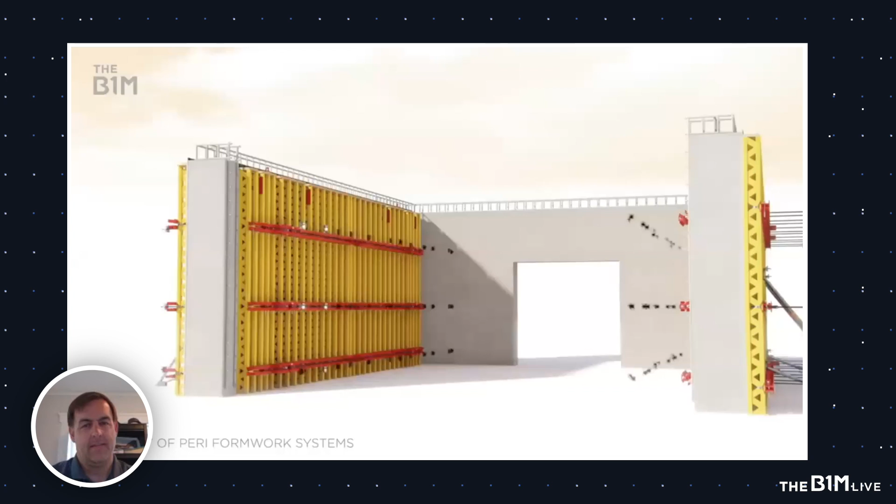I want to bring in Stephen Bradbury from Peri here, because Stephen, I think it's useful for people to understand, before we get to the complexities of how you build a concrete core after a steel frame, how you would normally build it with a Peri ACS 400 jump core system. So are you okay if I play this video just to kind of talk us through what's happening and how the system works? Yeah, sure, no problem, go for it.

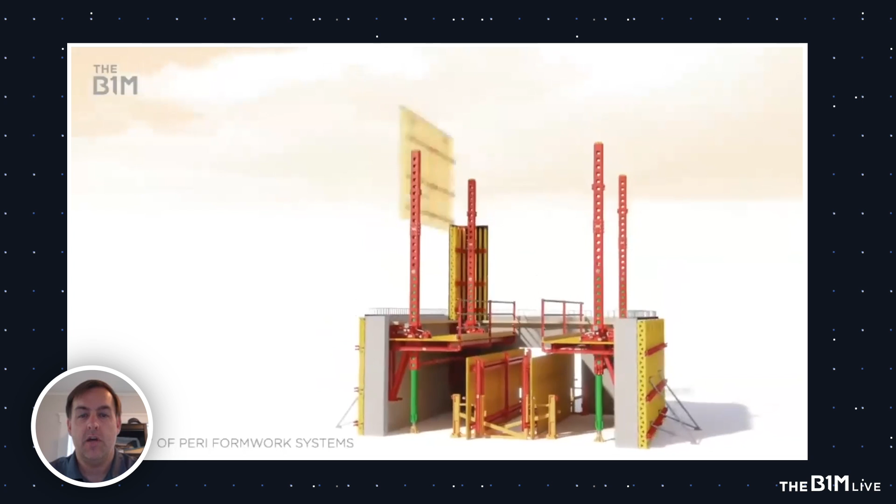So here we see the first pour being made with our Vario panels, the concrete struck, and now we're installing the internal hydraulics. And typically this is what's lifting the entire interior and outside formwork.

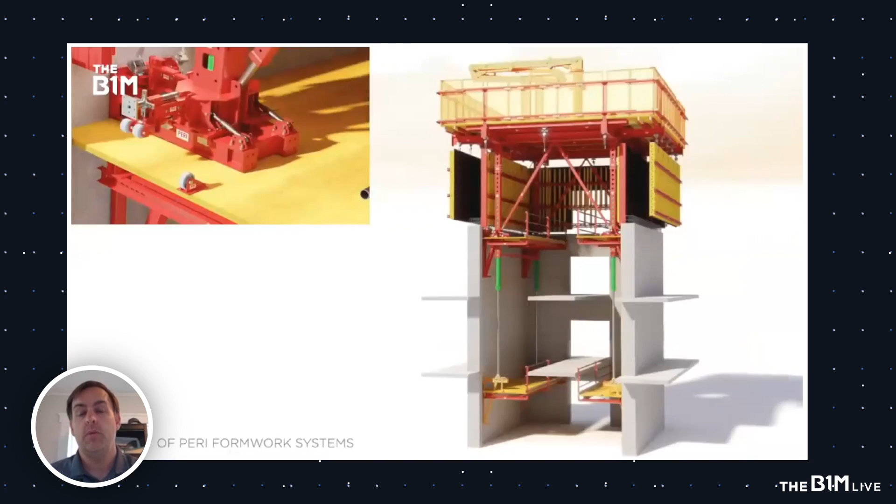So everything's climbed from the inside of the core, including the exterior forms, which are large panels to minimize the amount of labor, to minimize the amount of assembly. So in a normal application, this is what we're seeing. And you see the green rams. These are our hydraulic pistons that are anchored into the inside wall formwork. So we push up off the cast-in-place anchors.

Another live photo of a project, and it's all being climbed from the inside. The outside is being hung on our gallows systems, so everything is connected and driven by the inside platforms. And this is what we would see in a typical core job, and how we would like to do it on every job if possible.

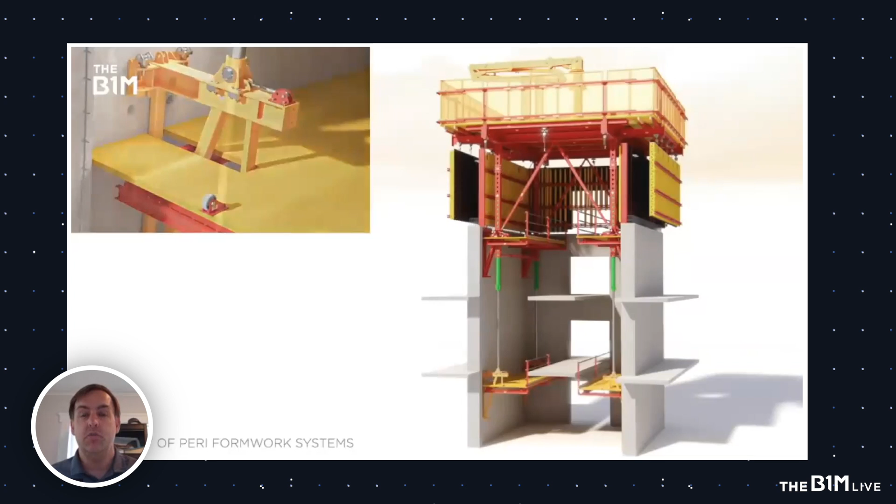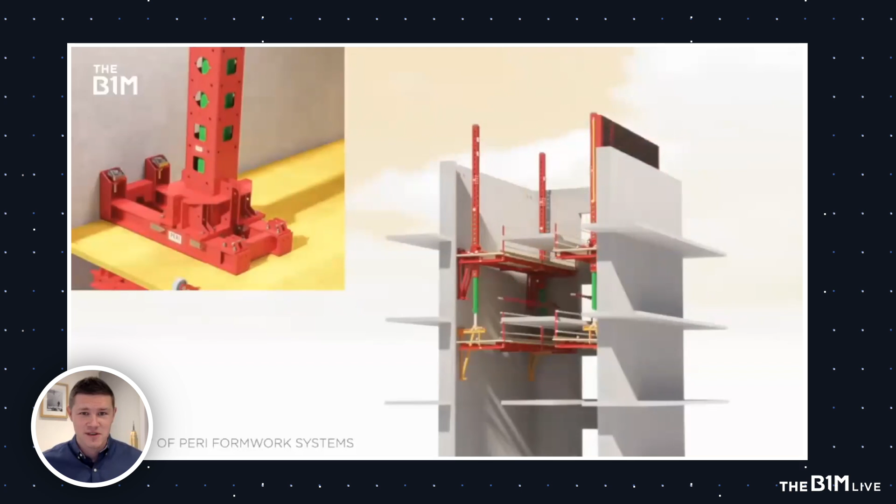Fantastic. That's a really good explanation. You can see it's an incredibly slick and well-perfected system. It is complicated, but it's very slick. It works very well on a number of skyscraper projects. And once it's in place, it requires very little labor to keep it going up. You know, some guys to strip ties and run the machines, but all the hard work is done in the installation, if it is hard, and then the next step is get it off the building at the end of the job.

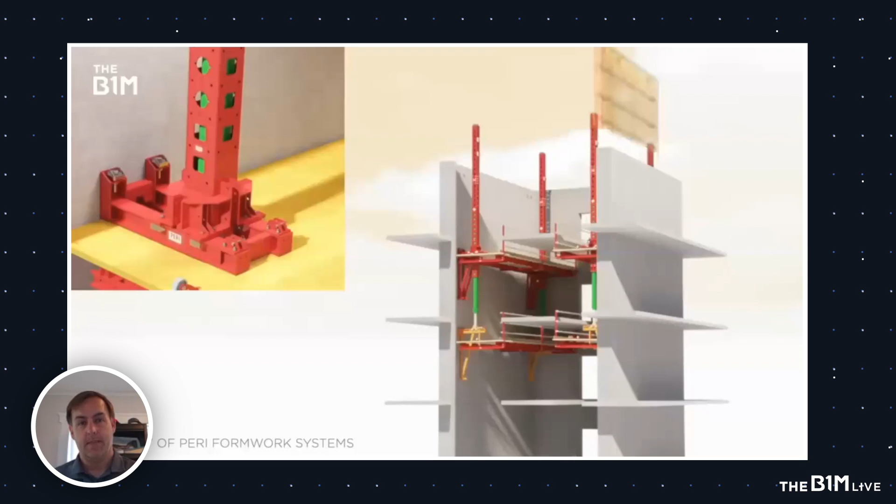Next thing is concrete pouring. So often the concrete slabs and verticals are poured at the same time, where you have a fully cast in situ concrete building. So forget steel frame construction, full cast in situ concrete building. You tend to pour the verticals and slabs at the same time in New York, which comes down to time and to speed, and helps construction teams really get to that 3-day cycle. So every 3 days they're moving up onto the next story of the building, and that's how quickly these buildings can rise on the skyline. Again, we're going to hear a little bit more about that later on from Stephen at DeSimone.

Now, last but not least, the Department of Buildings approvals, which I know Stephen Bradbury from Peri is very familiar with. This is a kind of special body, certainly in New York City, that has to verify and check concrete jump core systems. So the kind of systems we just saw in that video, they have to be verified, checked, and reviewed independently by this body before works can progress on site.

That adds time, it adds a bit of bureaucracy, and you have to make sure you get your design and proposals in quite early in the project, even when the project's still being designed. So again, another aspect that comes with putting a skyscraper up in New York that many people maybe have not appreciated, but that Stephen's going to walk us through a little bit later on in some detail.

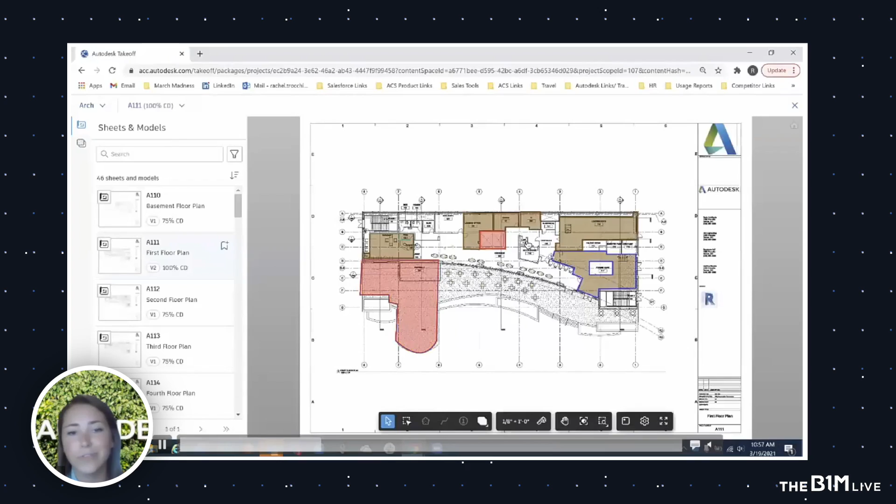To dive specifically into the 2D workflow, it's very standard to your traditional quantity takeoff process, but as you dive in, you have that collaborative environment. You can see any recent takeoffs you've made or any other takeoffs within this specific package that another estimator on your team might have created.

So we'll do a quick sample of a wall takeoff. As we jump in, we can give it a type name right here. Then we define the tool type. You have your standard area, linear, count, and then the BIM tool type, which we'll touch on in a minute. For our wall takeoff, we'll grab the linear tool type. We can add a description, adjust the colorization,

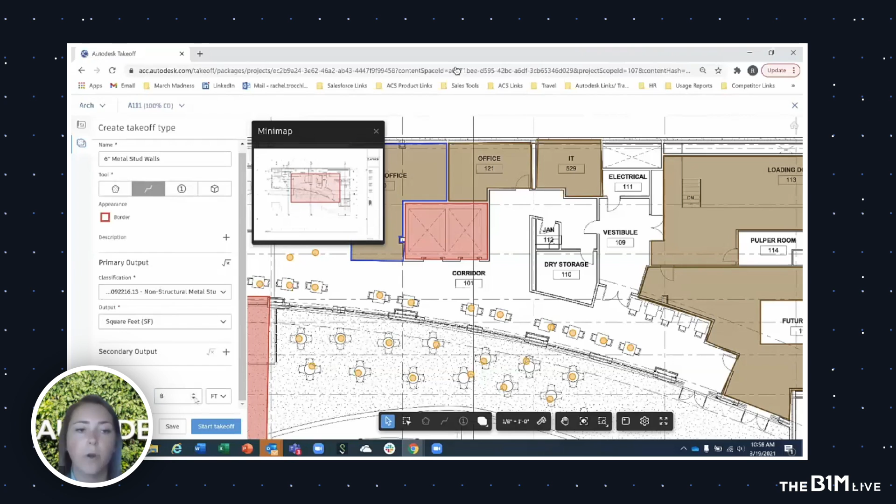and then we define this under a cost code. These cost coding structures are completely customizable. You can upload whatever cost coding structure you want to use, so if you have anything tweaked to your specific company, you can leverage that. And based off this linear tool type, we'll provide the default height for our wall to get the total square footage once we create that calculation.

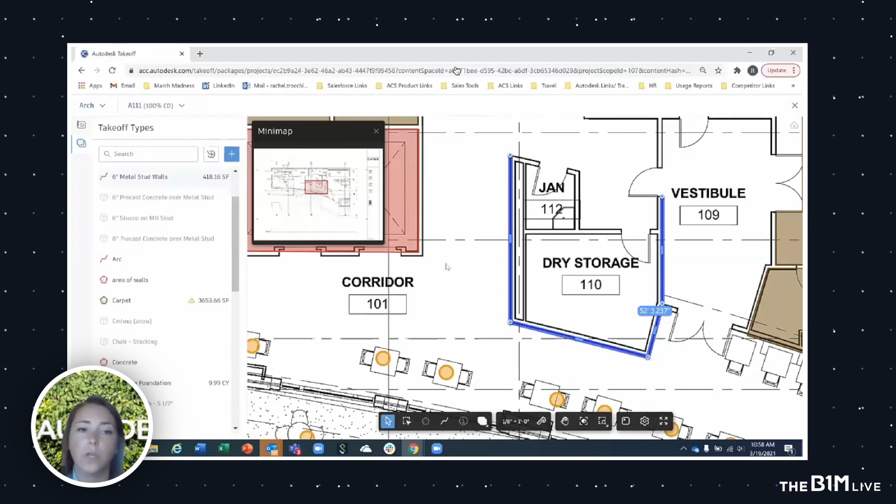Walking through, we have your traditional snap to points, and now you create that takeoff item for a wall. Once you double click to finish that takeoff for the wall, you can see your quantities right over on the left-hand side. They're automatically aggregating, and they'll ultimately be aggregated within an inventory along with our 3D quantities too.

Coming in here, you can adjust that takeoff type. You can add vertices if it's a curved wall, whatever it might need. And of course, that's all going to aggregate within the inventory. But before we jump into the full final quantity view, I want to walk through what the 3D takeoff is going to look like.

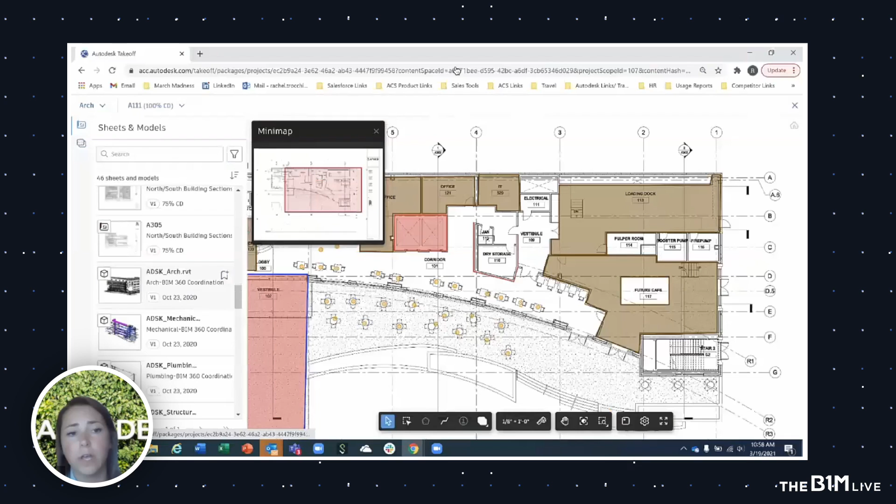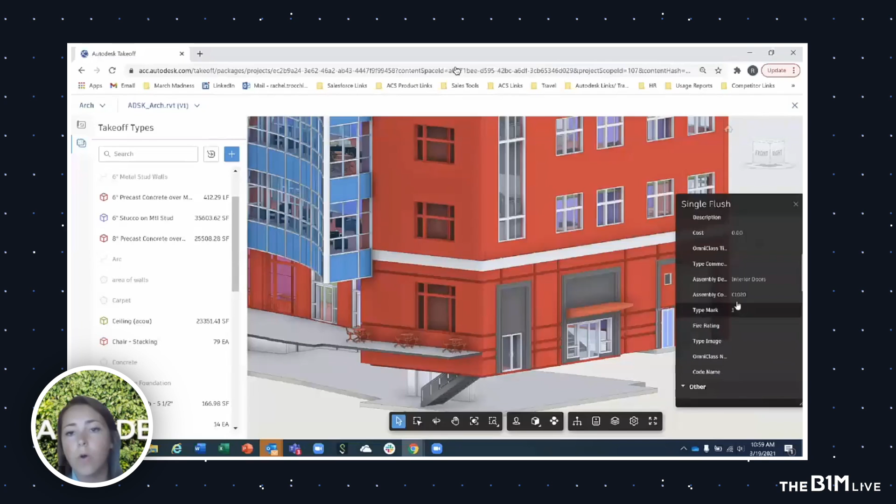3D takeoff is something that is slowly starting to get out there within the industry, but what it's really going to allow you is a ton of efficiency. Especially on some of these really large New York City skyscraper projects, leveraging the 3D model and its information can streamline efficiencies throughout the entire project, but also through the quantity takeoff and pre-construction process.

So for a quick door takeoff example, if I right click, you can select all of those different doors in here. And now, rather than selecting every single door within each drawing on each floor plan of the project, and we know on a skyscraper project there are a lot of floor plans, you'll be able to quickly associate that door takeoff type to a cost code.

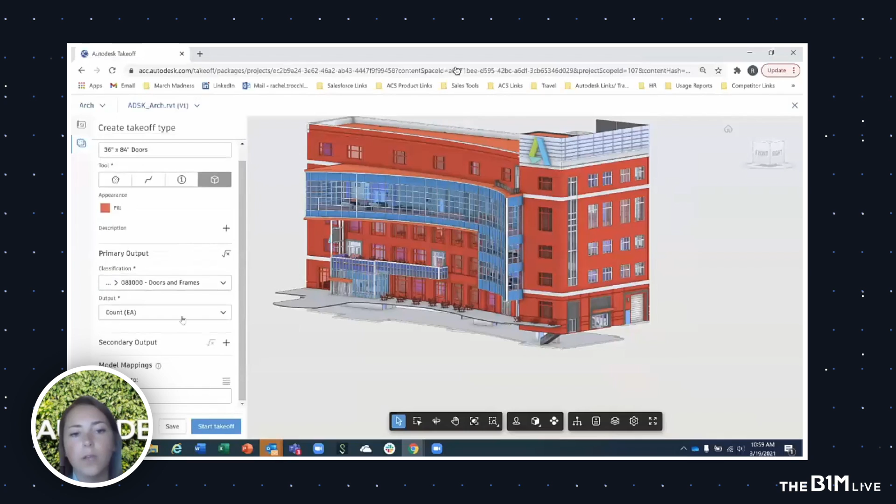And now right away, if we just come in and hit start takeoff, it'll automatically pull out every single door of that same type. And all you have to do is hit that check mark. And now you'll see that that door has been colorized and it's been taken off. So it's really quick and easy to start to aggregate all of that information from the 3D side of things and combine that together with the 2D piece here.

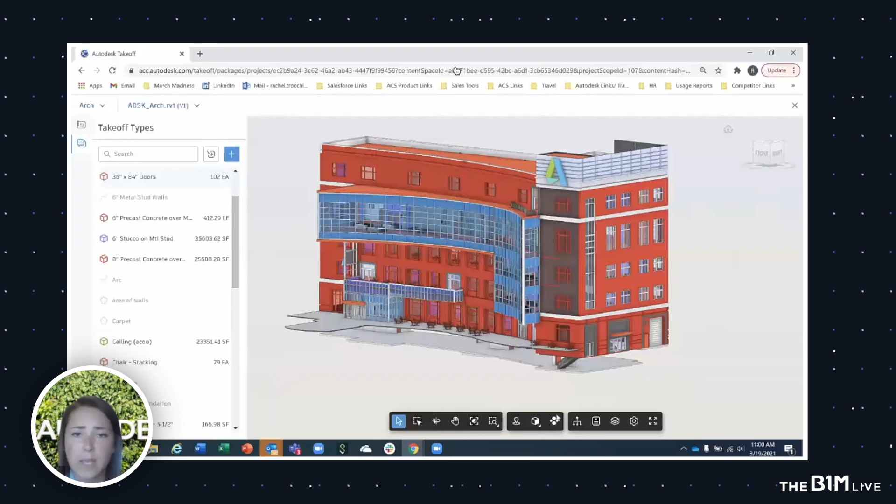A couple other pieces within the 3D: you have different filtering capabilities. So it's going to give estimators a lot more visibility and understanding into the project. And we have our form clusters command right here, which is going to quickly allow estimators to understand, in their typical project understanding early on, where all the different items are within the project. So we can break things down into different categories.

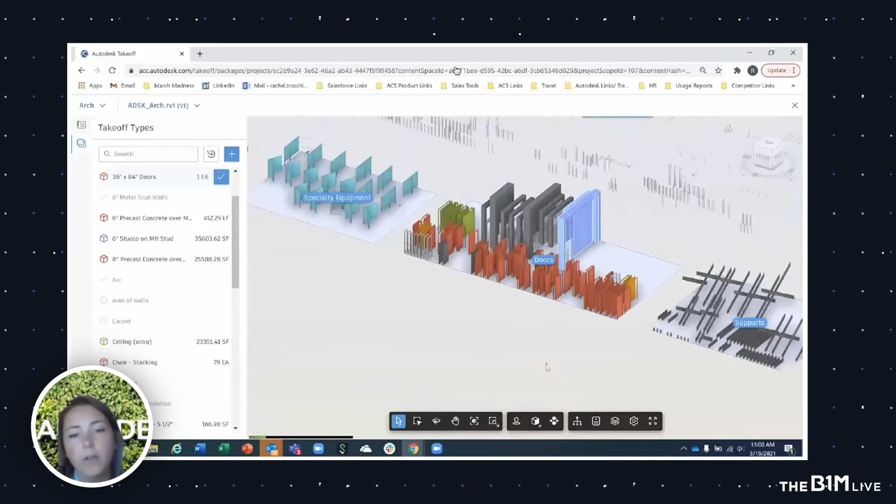You can see we have all of our doors here. We see all those red ones have been taken off, but those gray ones haven't yet. So now if we pop right back into the model, we can see exactly where that door was that we just had over there in the clusters. So a lot of really great capabilities here within Autodesk Takeoff.

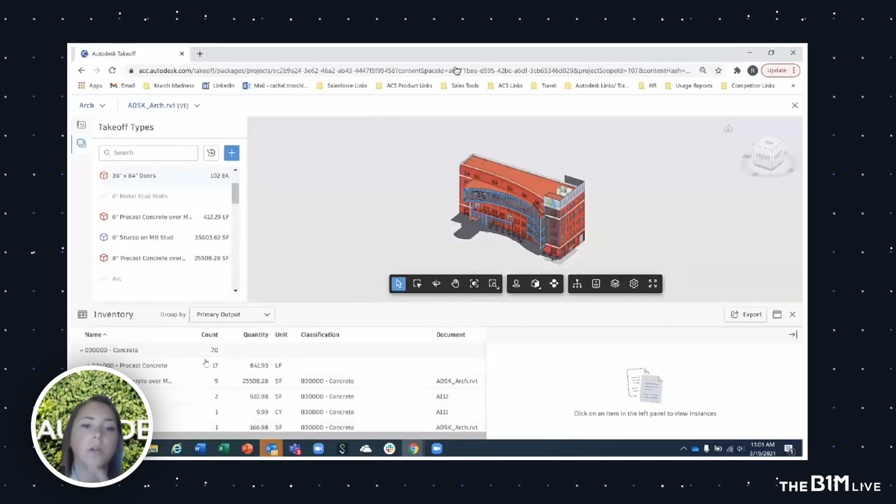And to round all of this out within that 3D and 2D takeoff process, it's all going to ultimately connect into that final takeoff report to then be pushed over into your estimate. So you can see down in here, you have all your different quantities for your takeoff items. You can filter and organize your quantities however you need to, based off of different takeoff type, or maybe based off of those cost codes that you have in there. And then of course you can report out this information.

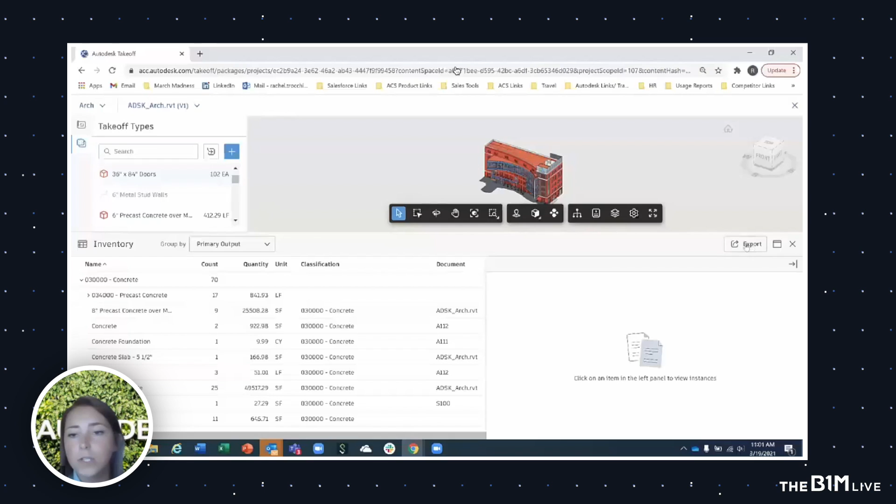So just coming right over into the export, we can push it right into Excel. I know a ton of estimators are still in Excel on their typical day-to-day. So we can export that information right to Excel, or you can push that over into maybe Sage or whatever other estimating solution you're typically using. So that's a quick overview of Autodesk Takeoff in general.

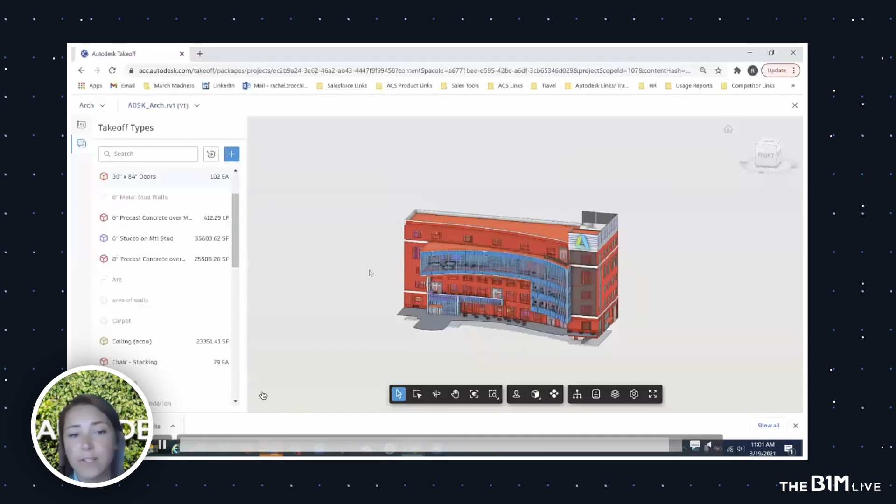And again, to highlight some of those key points: being able to leverage that 3D model when you actually have access to one, if you're working on a really large project or a design build and you can get in there early with the model, is hugely powerful and hugely beneficial to streamline some of those efficiencies. And just like we'll talk about, there are going to be a lot of potential schedule delays throughout the course of the project, so streamlining those efficiencies early on can be really impactful. So yeah, that's a quick overview of Autodesk Takeoff, and hopefully you guys see some of the value here.

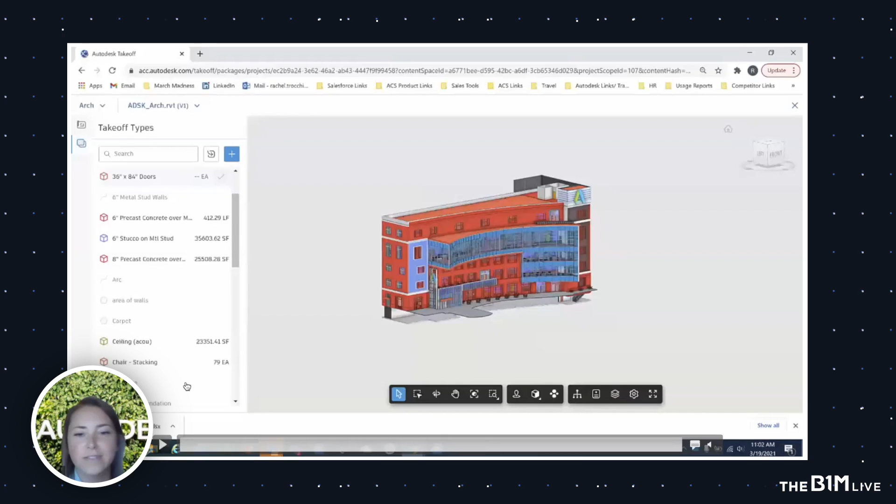Awesome, thank you, Rachel. That's fantastic. I think as anyone watching knows, getting your hands on the right data, particularly when it comes to cost, is absolutely priceless. So that looks like a fantastic tool. Thanks for taking us through it.